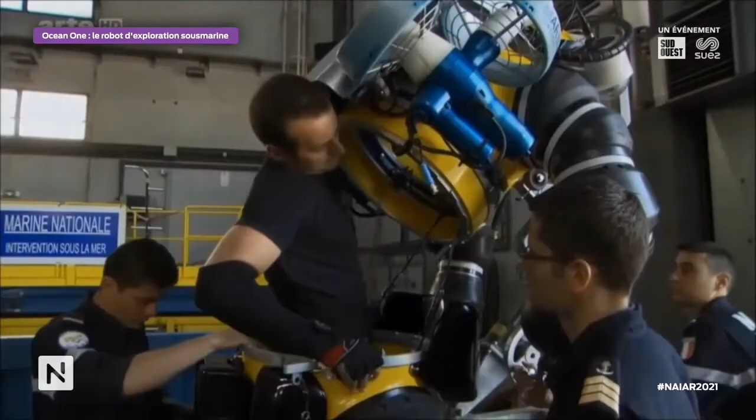Et ce qu'on a, on a des suits where the diver is going to be confined and it's very difficult for a diver to work in those conditions. Et je me vois en train de parler encore en anglais.

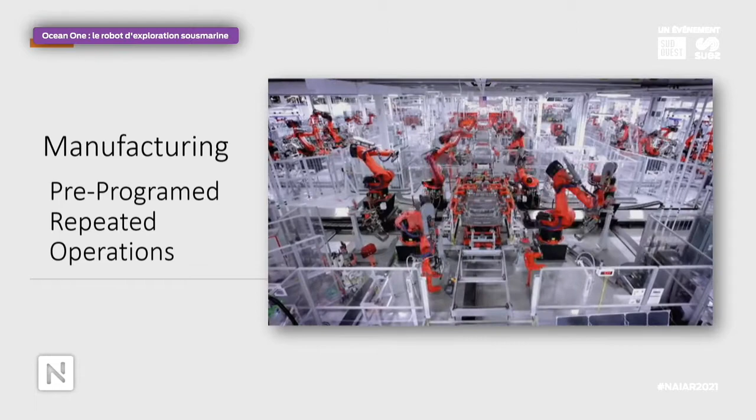We were able to program these robots successfully and make them work, and now we have millions of robots running all around the world. But when it comes to robots in the real environment, unstructured environment, dans l'environnement qui n'est pas structuré,

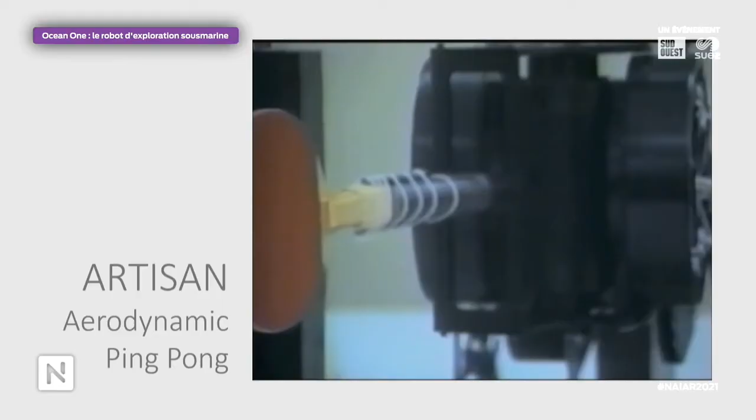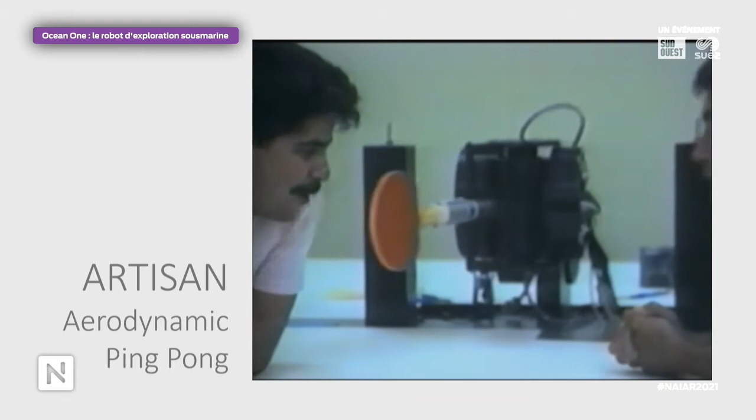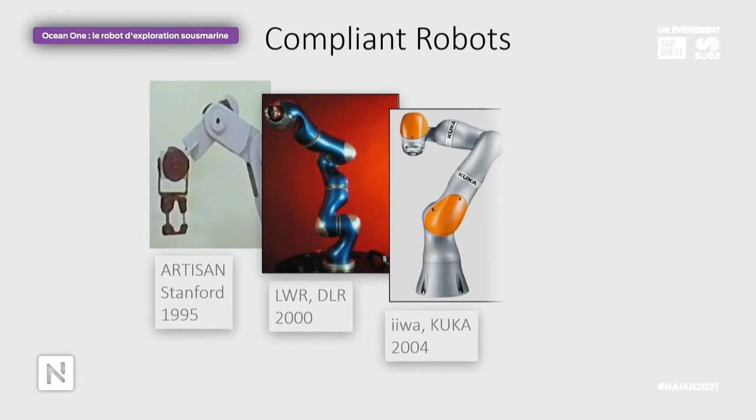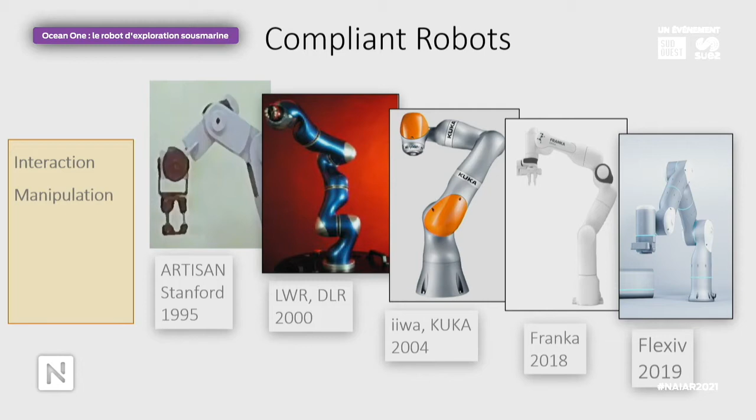This is amazing. You're just blowing on the robot, and the robot is moving in response. So this idea brought a lot of development, industrial development, starting with the work at DLR in Germany, and then the first commercial product of compliant robots from KUKA that led to many other developments that would allow us today to have the right machine to interact in real time with environments that are not known in advance.

So now we have the robot. Victoire, génial. On a tout ce qu'il faut.

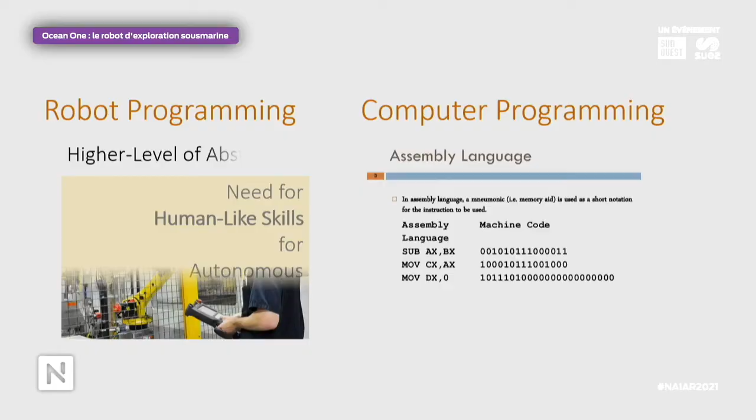Unfortunately, we still have our old habits. That is, we are misusing those robots. We are not using the robots to their full capacity. And we are still computing trajectories to move every joint of the robot to reach a task. So we are still programming the robot as if we were programming computers at assembly language level. And what we need to do is to have an abstraction that would allow us to control these machines with human skills.

So we can learn a lot from humans, but in order to learn from human, what we want to do is extract the skills and build those skills for the robot. We can observe the human, record motions, record forces, and the idea is not to record trajectories and try to interpolate between them.

The idea is to look at this data, segment the data, and try to understand, which means we look at the frames of compliance and find the relationship and see what was the strategy of the human in performing that task.

Then there is another important aspect: we need to realize humans and robots are not the same. We need to adapt the strategy to the robot. Then we can execute. So we can teach with haptics.

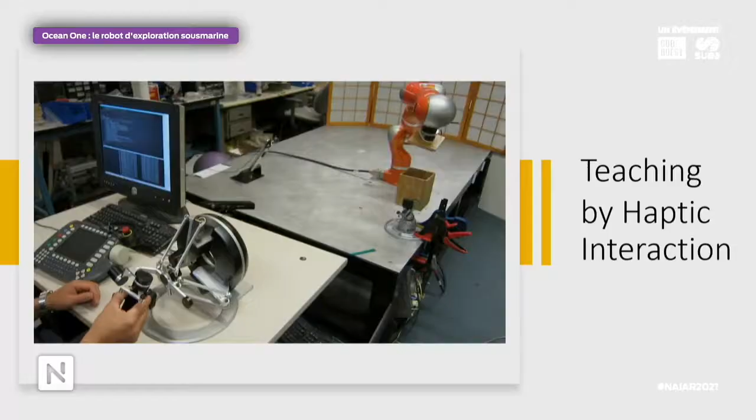Here you can see how haptic works. We can move the hand and we touch, and now we have a recording of everything. And then we can perform this task autonomously.

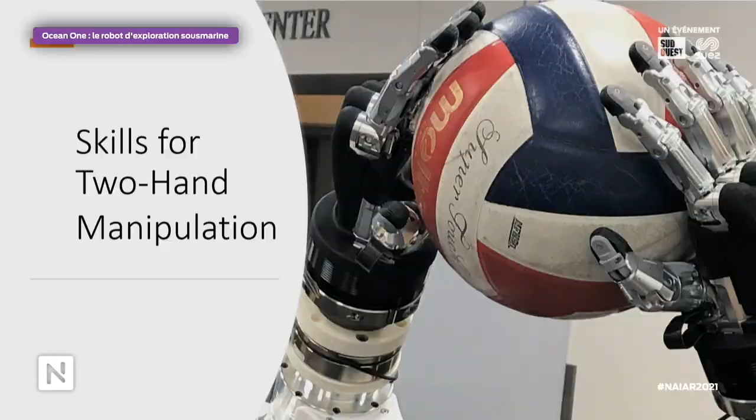I mentioned before, two hands are very important in an unstructured environment. You don't have fixtures, you cannot work. If you place one hand behind your back, well, you cannot do much. And that means we have to look at all these different capabilities, and we don't have all the robots that we need with all the sensors that we need.

So simulation is very important. We developed a platform called SAI that allows us to simulate, especially contact—physically correct contact and collision between multi-links colliding at multiple points. So now we can have multiple robots, multiple arms, cooperating.

You see these flashes—these are the disturbance forces that are applied to the robot.

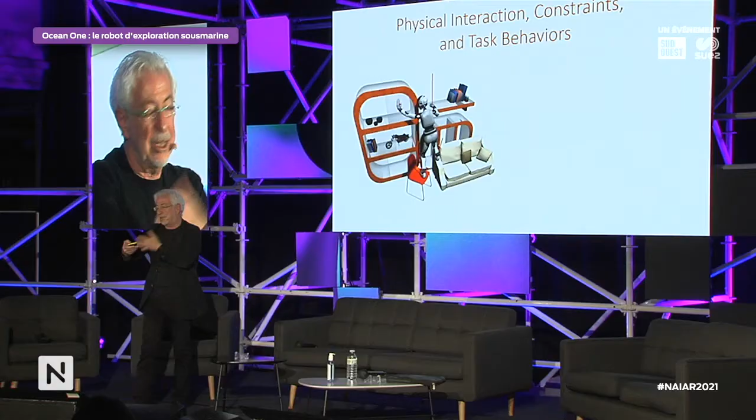And inspired by the human, we see that in fact the human always focuses on the task, and automatically the posture is adjusted, and automatically contact is maintained while dealing with all the constraints and also handling the balance.

So, inspired by the human, we developed algorithms we call constraint-consistent whole-body control algorithms, that allow us to control robots in real time to do things that are almost—even in simulation—very difficult. So here you have moving surfaces, and you have slippery surfaces.

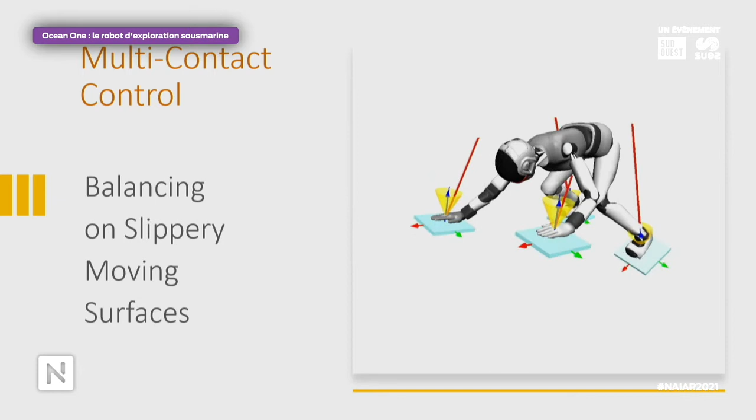These yellow cones represent where the reaction forces should remain, otherwise the robot will slip. And this is done in real time, and this was implemented on a real robot at DLR.

So when we think about this collaboration, I was talking about those levels of whole body control, the skills, but these connections are not happening at the same rate. That is, to control the robot, we need to communicate very fast. But to reason about the environment takes longer time, because these are inputs to the lower level systems.

What we are developing in robotics here is merely functional autonomy.

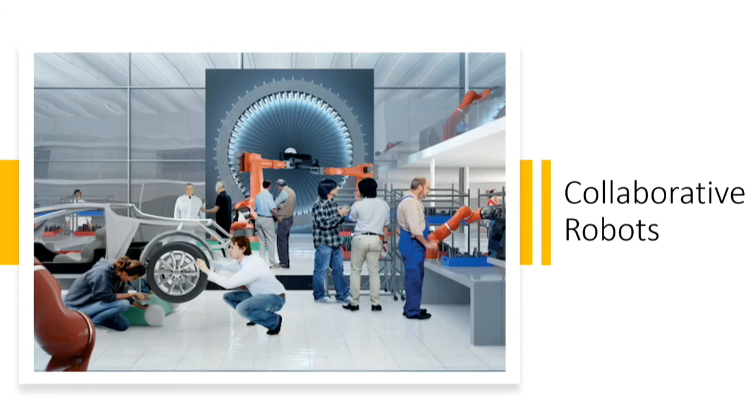Now, if the human is interacting with the robot, then we need to make sure that we understand the human. And understanding human—we were studying human to imitate human. Now we developed algorithms that are very useful to understand human. So now we can model the human in our simulation and reconstruct real human motion.

And then we can go further than biomechanics. So, complex structures like the shoulder complex are really not explored. Finding the muscles is typically done using cadavers. So we started to use MRI, and we are able to scan living humans and get richer, more realistic models of the muscles.

And all of this is leading to a lot of interesting results in understanding the behavior, the capacity of humans. In fact, we are able to use metrics from robotics and apply them to metrics of human.

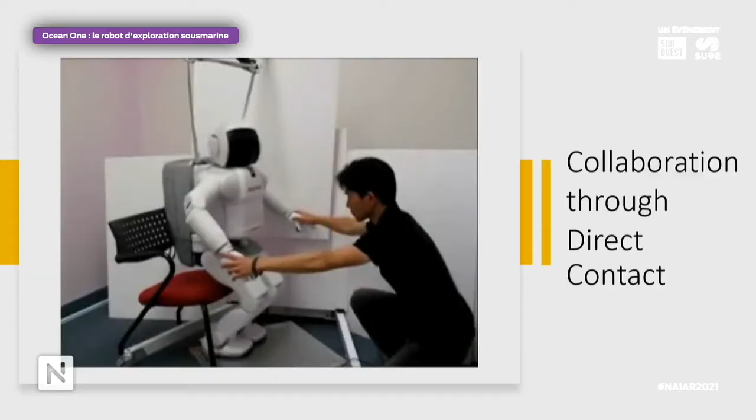So now we can collaborate with the robots, guiding the robots. You can see how even the robot is surprised in the motion, going like, what is going on? When we interact with the robot, we should make sure that the robot is not fighting, that the robot is complying, at any point of contact with the robot.

This collaboration can also be done haptically. So here we are guiding the robot to a complex task, and now the robot can learn this task and perform it. There are so many applications to this concept, remote interaction with environments that are dangerous. For instance, hot cables where you have high tension, and the question is, can we remove the human from here?

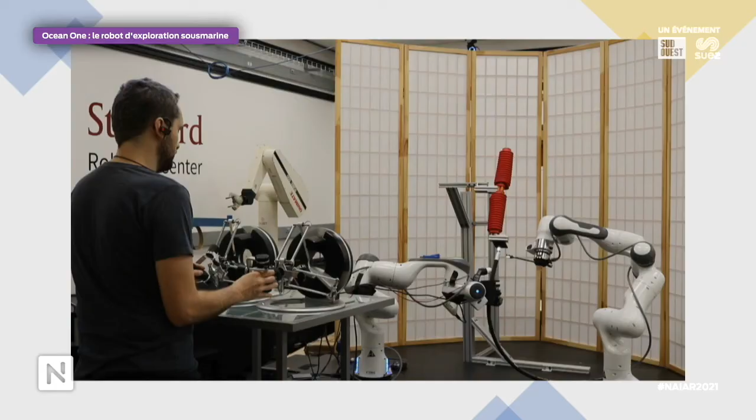Well, this is what we are doing. We are going to remove the cable, and the human is intervening, but the robot is autonomous in the task.

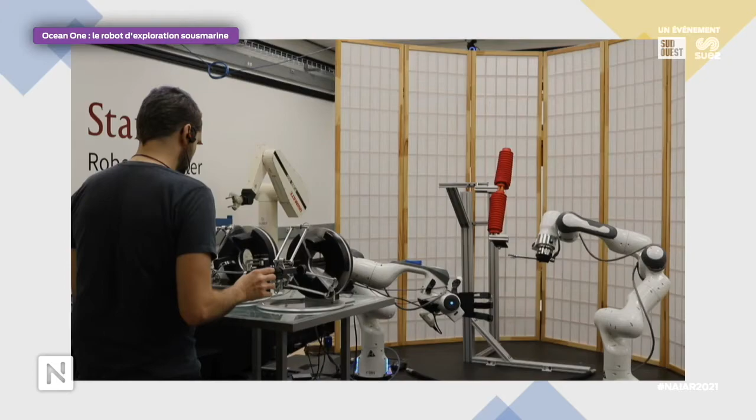Autonomously. So when the human is intervening to make corrections.

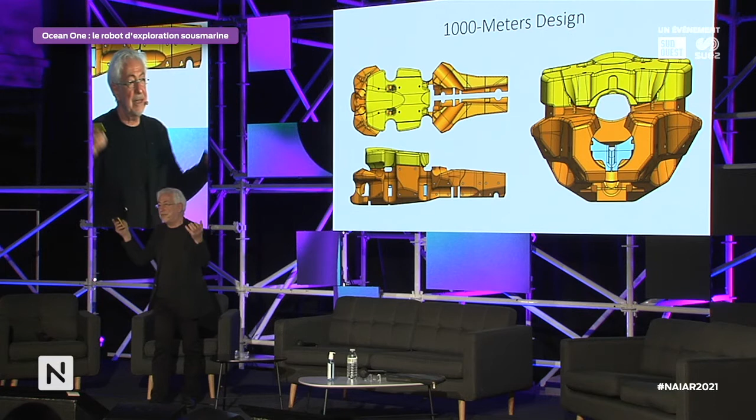So we decided to go to 1,000 meters with Ocean 1K. Now, the challenge is, how can you build a robot that can reach those depths and can sustain the pressure there? One of the key problems is the flotation. The flotation is very, very challenging because if you put more density, the robot is heavier, which means more volume, and the robot becomes very big and cannot move in those complex environments.

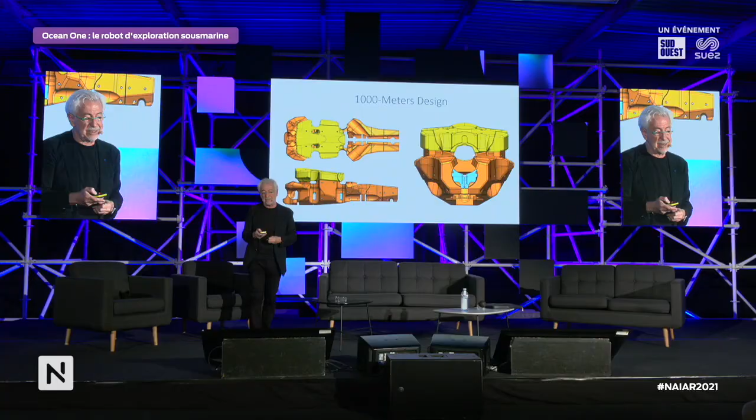Fortunately, we found in France a technology that brings hollow glass microspheres. Very light, very strong, and you see the blocks - those blocks are allowing us to rebuild the whole form of the robot with much lighter weight.

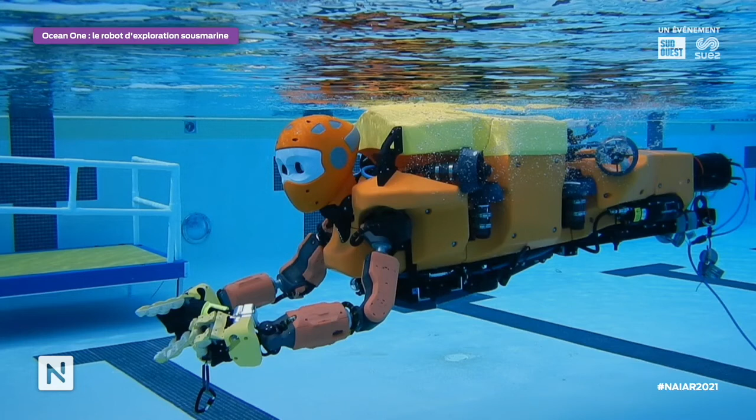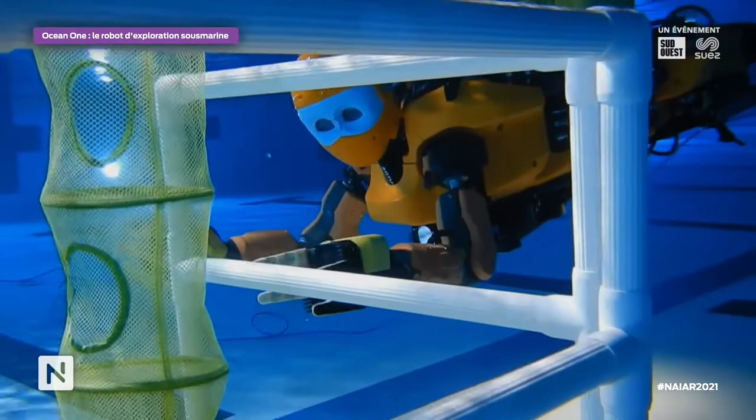So here is the robot after years of design and development, and I'm going to show you a little bit of the work that we did during last summer, during COVID. We were allowed to use the pool as a laboratory, and we were able to take the robot there and interact with it and develop most of the basic tasks that this robot needed.

So this robot also has additional capability like moving the head, so we can see the hands and we can locate objects in the environment and interact with the environment.

The robot was also learning how to grasp objects, even if the objects move, because now we have compliant fingers. And this is another task where the robot is reaching to a location or coordinating the arms to move and place these objects in locations, learning how to use tools.

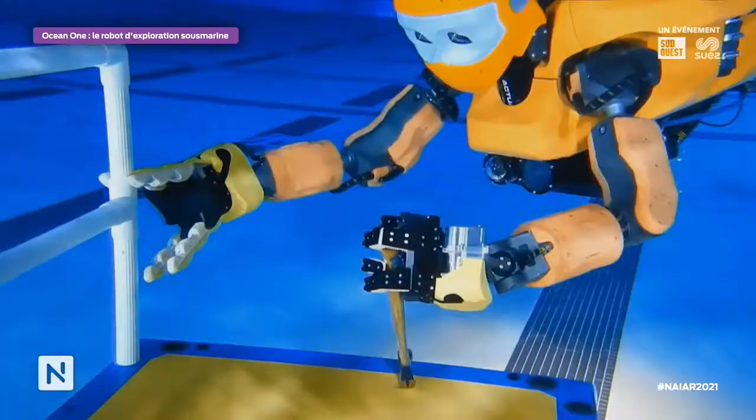It was the first steps for the robot, and it was really amazing that most of those concepts were immediately feasible and came to be successful in the pool. So that was December of 2020, a year ago, and we were looking forward to going to a big mission that we

were planning in Marseille and around Marseille and in Corsica. Michel L'Hour is the head of underwater archaeology at DRASSM, and he was the big motivator for bringing this robot to those challenging environments.

This was my encounter with Michel, which came about through a very good friend, a longtime friend, who is here. Can I see him? Where is he? Ah, Philippe Bidot. Thank you, Philippe.

Actually, Philippe was behind that encounter that led us to develop this relationship with DRASSM and taking the robot to La Lune, but also in the pursuit of this effort to take the robot to many other expeditions.

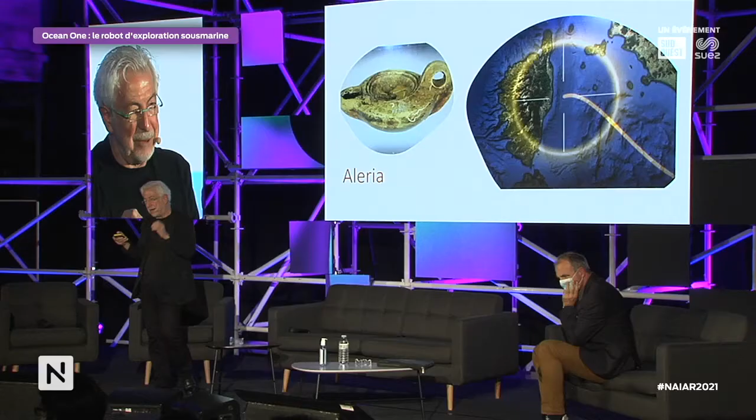The other part of the mission is around Corsica, in an area called Aleria, which has beautiful treasures including this 2nd century AD vessel with beautiful oil lamps. These oil lamps are really difficult to bring to the surface at 350 meters, and we are going to try to reach that location and bring those lamps up without scratching them.

Another interesting vessel is the Italian Crispi, at 500 meters. Now it's very serious - 500 meters, no human can reach even with all kinds of technologies. This vessel was involved in World War II, and it was only discovered in 2015.

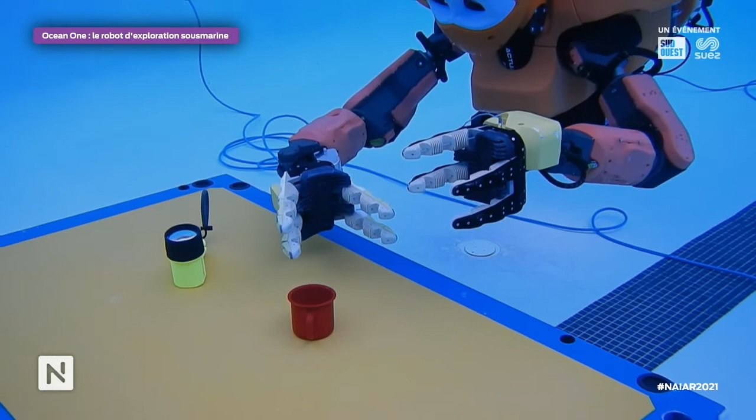Here is some of the preparation we did with the Ocean One in the pool, learning how to wrap around an object and grasp it. But grasping an object directly with the hand is one thing - you're going to have large objects, small objects, and you need to coordinate the hands together to approach and work with them.

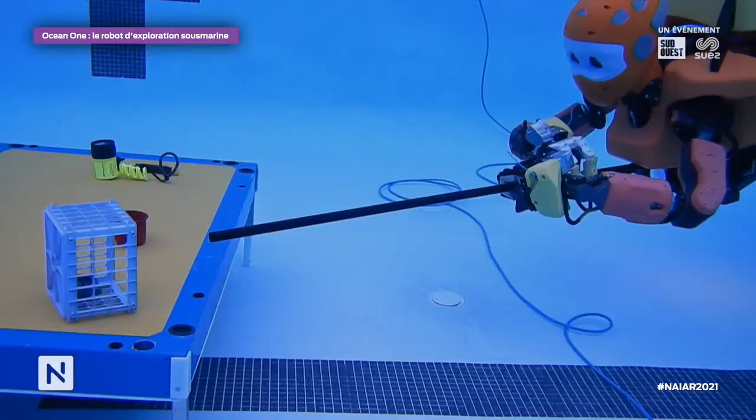But the most important part is the tools you can use, and how you handle and grasp these tools. One of the tools we conceived is a pole that is going to allow us to reach inside windows and structures that can be far from the robot.

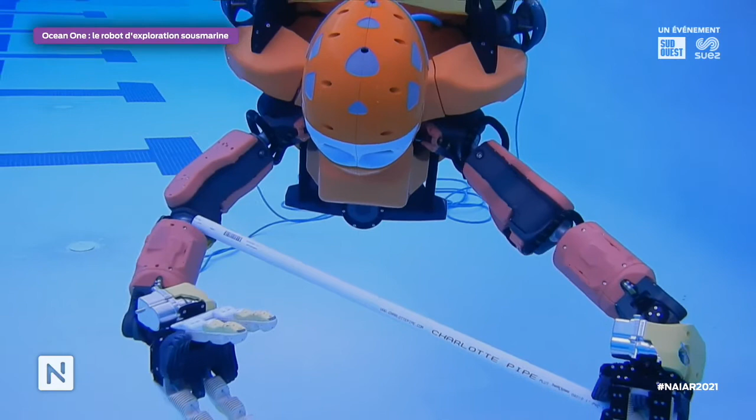You can see here the example of coordinating the hands and moving. You might also have to rotate these, because depending on where the sensor is placed, you need to pass the pole between the arms and regrasp it again.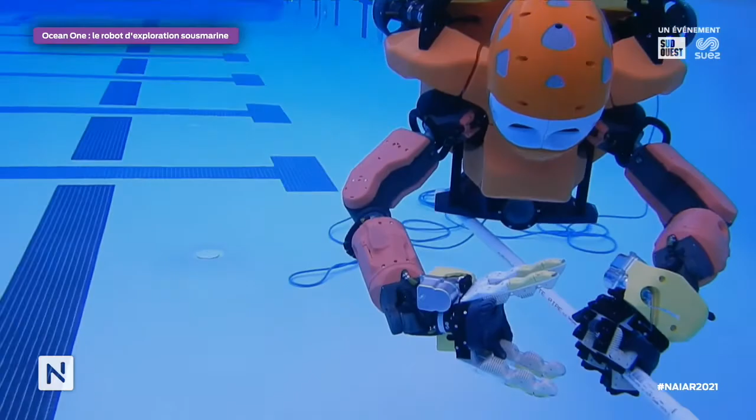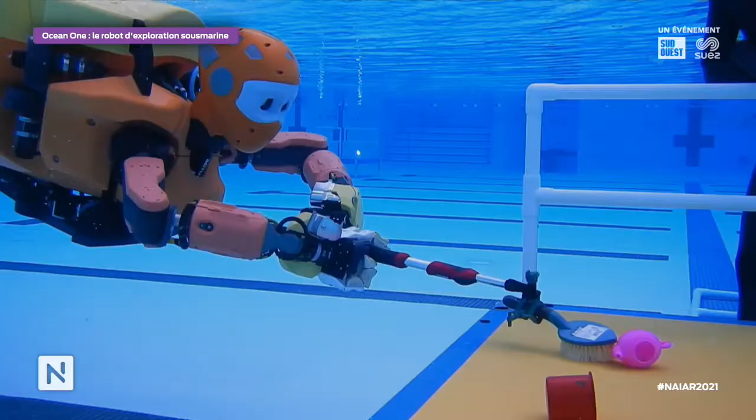These are some of the tasks that the robot was performing, and they are very difficult because you only have 3D vision focusing on the hands, and you don't have the global view unless you have another robot with cameras showing those configurations.

Here we are securing part of the task by pushing the object and then grasping it. Here we are luckier - the object didn't move too far. I wanted to mention this because it's really a new idea that would be fantastic, especially if you're performing sensing, like scanning a structure with cracks, as you can see the robot doing here while it is moving.

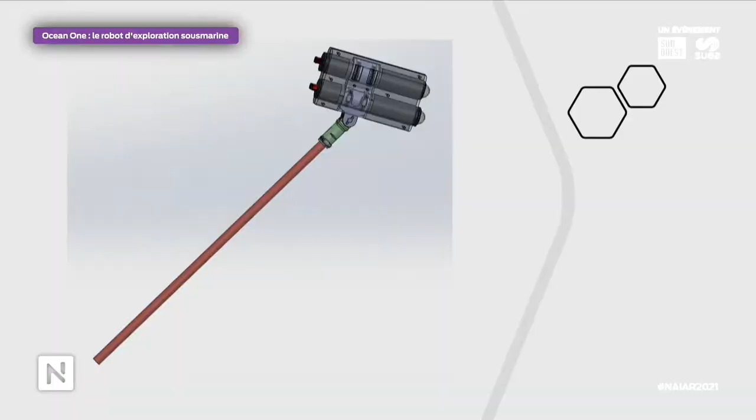Here's the idea of adding a camera with light. We built an electronic system with cameras and lights with delayed starting. This is so powerful because now we can go inside structures and film what is inside with light that otherwise wouldn't be there, and no robot could handle before.

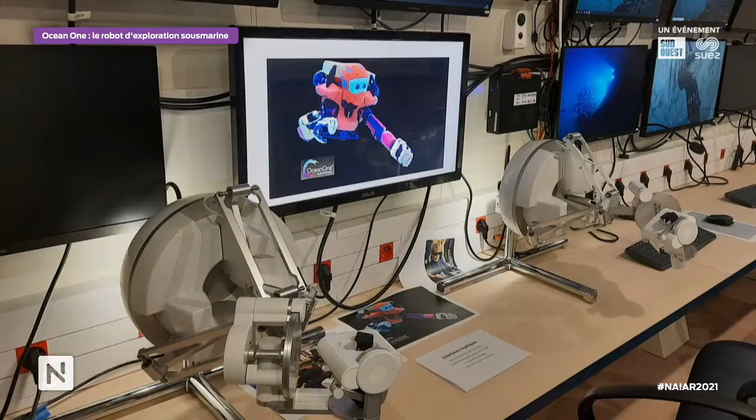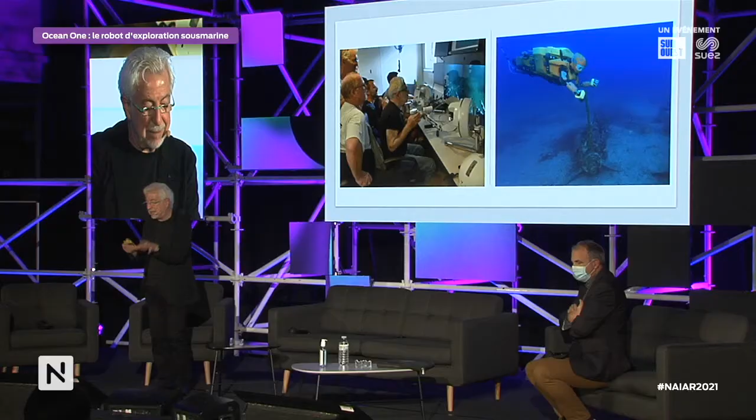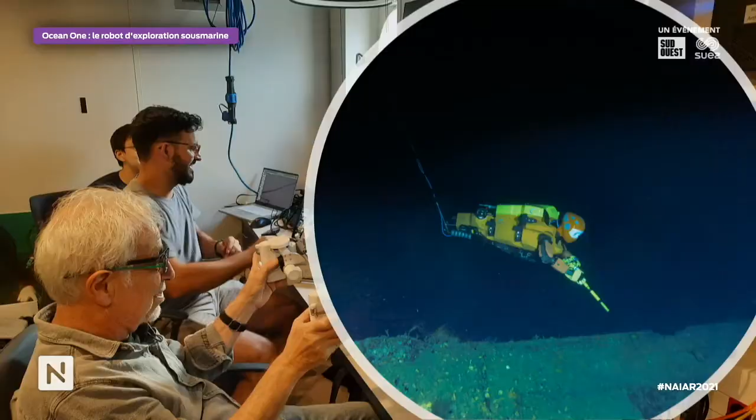At the end, we are diving on the P-38, and you can see the haptic device - basically my right hand holds the right hand of the robot, left hand holds the left hand of the robot, and you feel them and work through the haptic interface to interact with the environment. Here at 40 meters is the robot over the P-38, and then we went down to 124 meters on Le Protet, at a higher depth. In fact, we already broke our previous record - it is an amazing site.

The rest of the mission is going to be pursued in January. And in the meantime, I wanted just to share with you a small teaser of what will come in February as probably a long film about that expedition. This is, there is some sound maybe here.

So it's a 50-second video just illustrating the motion of the robot on the P38 and on Le Protet. You feel a connection between the operator and the machine interacting with the world. You are connecting a human to places that cannot be reached, and this is really amazing.

So a mission like this is not just the students who are working on the robot. It involves archaeologists, it involves a big crew that is bringing this robot to the location and helping deploying the robot. It was an amazing experience for our students and for everyone, and it is a story to be continued.